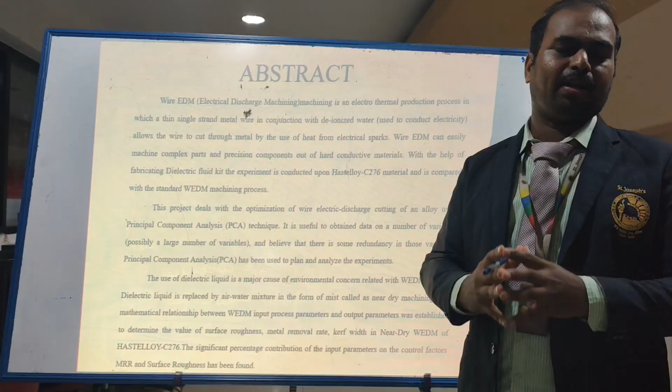As an abstract, first we have to know what is wire EDM. Wire EDM is an unconventional non-traditional technology in which it removes material in conjunction with deionized water, with a thermal zone between the tool and the workpiece. We don't have any physical contact between the tool and the workpiece. With a single strand of wire, the wire can be zinc or brass coated with molybdenum, of diameter 0.15 to 0.165 mm, used for this process.

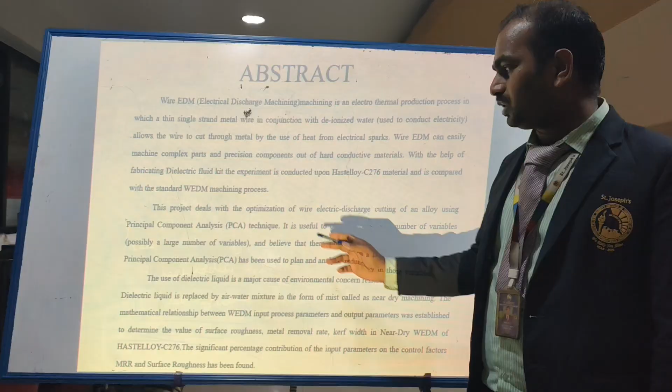In this technique I have given a short descriptive abstract. I am using a very important design of experiment technique called principal component analysis. There are various techniques available in software like the Taguchi method and surface response methodology. Here I am implementing principal component analysis with three modes of dielectric mediums.

So what is dielectric medium? Very often we use dielectric mediums of different types. The dielectric mediums can be kerosene, mineral oils, but the most predominantly used dielectric fluid is deionized water. The deionized water has a pH value that should not corrode the material, and should have no negative impact on the machine or on the superalloys.

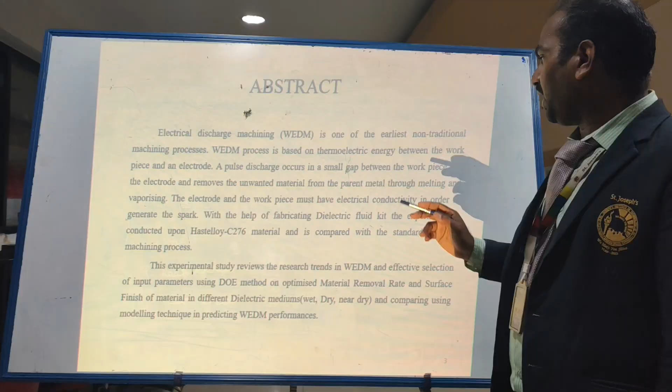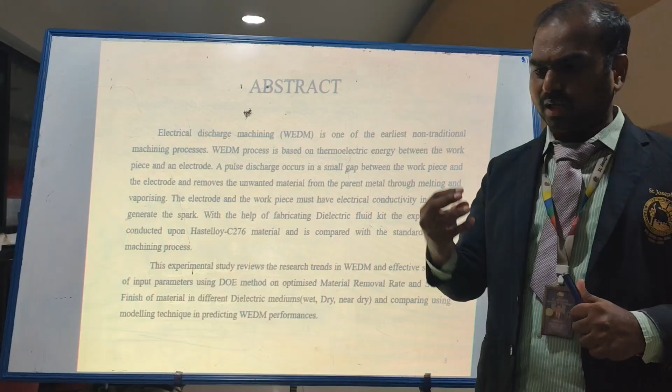As I said, wire EDM is a thermoelectrical energy process between the workpiece and the electrode, creating a small discharge between the tool and the workpiece. When the pulse on input is given, an electrical spark discharge occurs between the tool and workpiece, such that the variable gap creates debris of the workpiece and removes material in a phenomenal way.

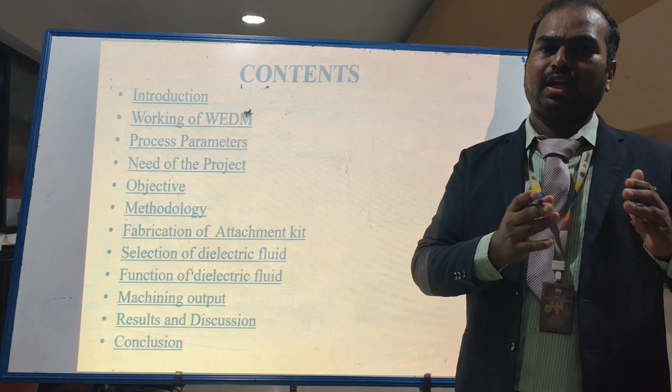The content of this topic is a brief introduction on how wire EDM works and how to choose process parameters. Each individual machine has various process parameters, of two types: input and output. Input parameters completely differ from machine to machine, whereas output parameters are phenomenally fixed, like material removal rate, surface roughness, kerf width, and also SEM analysis and microstructure.

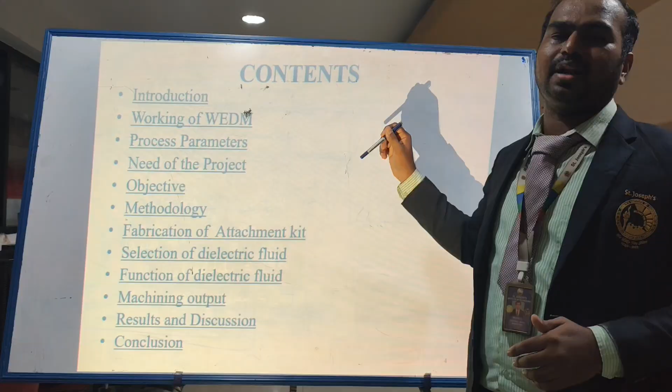This is why we choose this thesis and use these objectives and methodologies. In this research work we use a special fabrication unit technique with three different modes: wet medium, dry medium, and near dry medium. So first, what is wet medium?

In unconventional non-traditional processes, in both industries and college laboratories, we typically use only wet conditions. The wet condition involves deionized water flowing from the lubrication tank through the nozzle and inlet, hitting the workpiece, where the material removal rate takes place. So continuous flow of deionized water is called the wet condition.

What is near dry? Near dry involves a compressor and a nozzle fixing various pressures. For example, we take a compressor of 2 bar to 10 bar pressure, varying it to 6, 4, and 8, along with deionized water being sucked from the lubrication tank.

Through the nozzle, we are going to have a mist format in such a way that the material removal rate will take place in a phenomenal way, and the characteristics of the material as well as the material removal rate and surface roughness will be more significant when compared to the wet condition.

Next comes the near dry and dry conditions. The dry condition is only with compressed air. There is no need to use deionized water or any other medium source for machining. Only by using compressed air through the nozzle do we concentrate on the workpiece, where we machine very eccentric and complicated surfaces based on the designs.

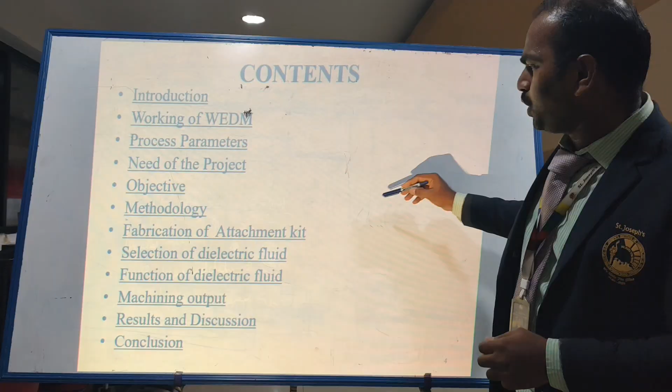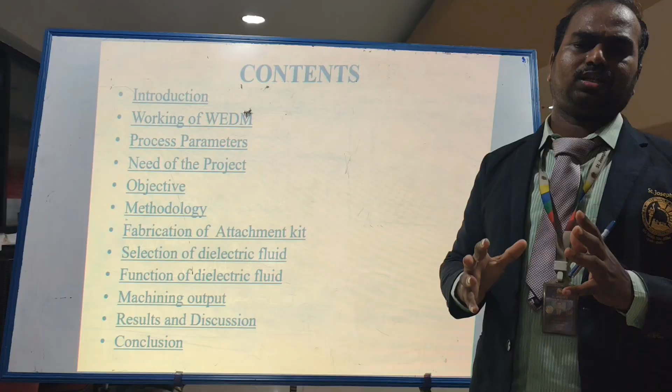Next, we are going to fabricate one single unit. In that single unit, all three mediums can be easily attained. By fabricating this technique, what I'm going to do is take the attachment kit, and by the side of the FRL unit, that is the filter regulator lubricator unit, we attach this kit in such a way that the three mediums - wet medium, dry medium and near dry medium - can be easily attained by this attachment kit.

So most prominently, they will be using only a single mode by using this technique. This attachment kit will help you create more applications and save more time, and the reduction of time will be easily obtained by using this kit.

The next one is the selection of dielectric medium. As I said in the previous research papers, many dielectric fluids are available - deionized water, mineral oils and EDM oils. Most phenomenally in the industries, they will be using only deionized water.

Why are we using deionized water? Because of the pH level and its availability, using deionized water in the process will not corrode the workpiece and fixtures, and it will create a more positive impact rather than a negative impact when it comes to choosing a proper dielectric medium.

Next comes the machining outputs. As I said, the machining output is a phenomenal factor which is going to focus on the input parameters that we give.

Input parameters for wire EDM can be categorized into various types. To be precise, I'll give an example - the EDX50X, a particular machine available in various industries. In these machines, we use input parameters such as pulse on time, pulse off time, wire feed, and the servo mechanism. These four parameters are very important input factors for obtaining the machining output - material removal rate, surface roughness and kerf width.

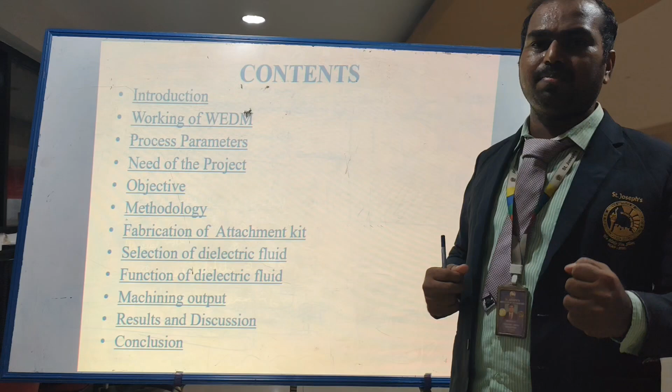So first of all, what is a superalloy? It is a very hard material which cannot be machined by normal conventional machining processes like lathe or shapers. Whereas when it comes to wire EDM, an untraditional process, these hard conductive materials with a low machinability index can be easily machined using this wire EDM with the latest technologies.

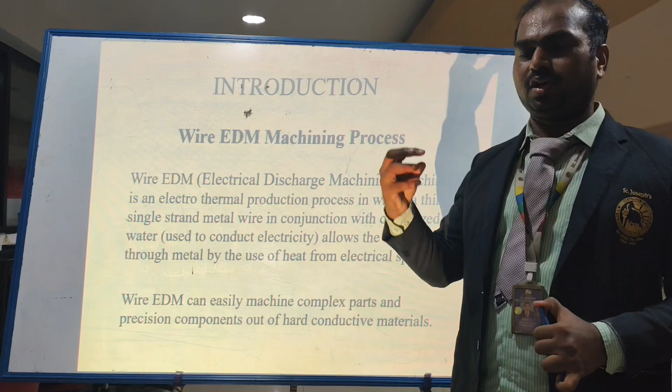Lastly, I'll present the results and discussion with a proper conclusion, including SEM analysis and various categorizations. As I said, wire EDM is a process that uses deionized water and creates a spark between the tool and the workpiece, in which material gets removed in the form of debris. This debris is then flushed away through the lubrication tank using the concentrated nozzle with various pressures.

So these EDM machines can be used in industrial applications for complex materials and eccentric shapes and designs which cannot be machined by normal traditional machining processes. Yes, so this is the basic diagram.

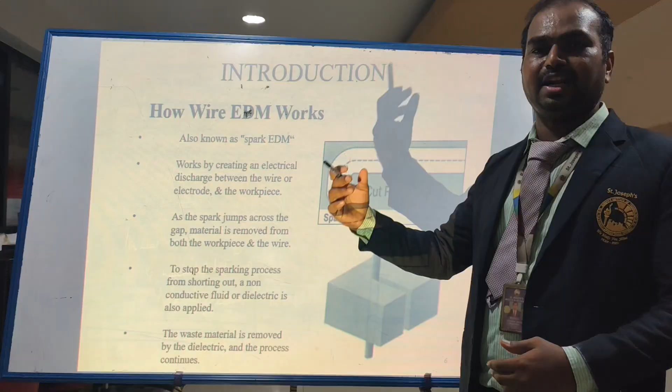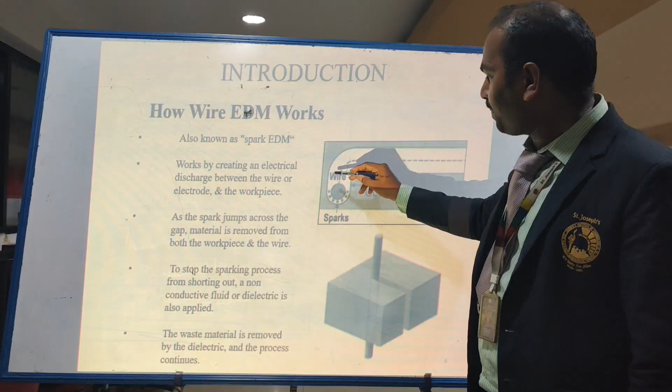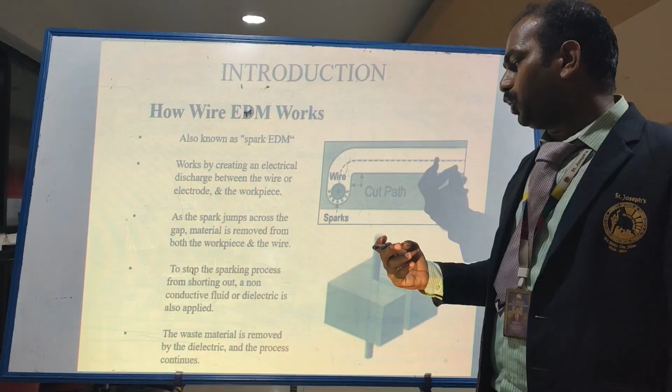First, this wire EDM, when connected with the positive and negative terminal, creates a spark in conjunction with the material, which can be either conductive or superconductive. Material removal takes place based on the path or design we input, and it cuts the material, with debris removed as per the pressure and pulse on time given. To stop sparking from shorting out, we need to choose a proper fluid, and dielectric application should be proper.

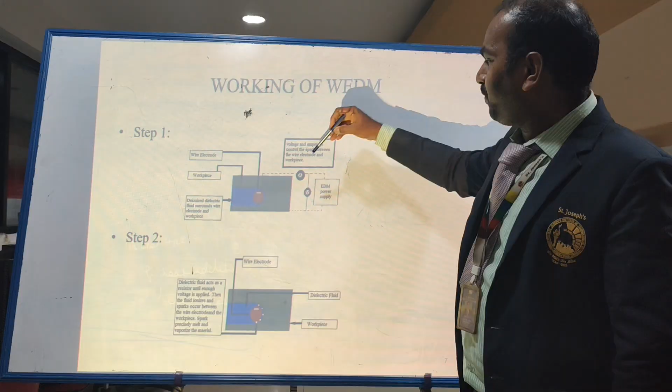I have framed the working of wire EDM in 4 basic steps. Step 1: we choose the wire electrode material, which can be either superconductive or very hard material. The wire electrode is surrounded by deionized fluid along with the workpiece, which is connected with the positive and negative supply of the EDM process.

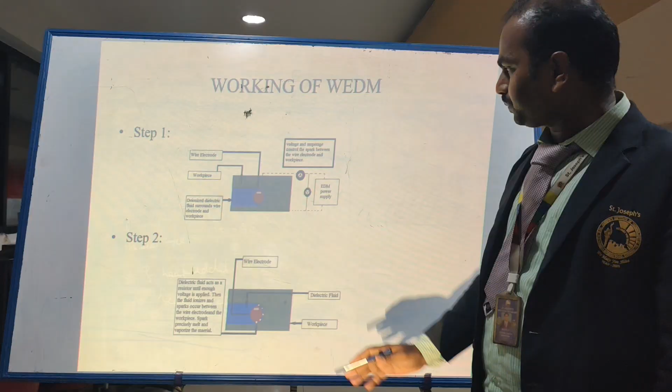Step 2: it creates an electrical spark in which a path is created between the workpiece, and it removes very fine debris which is flushed away in the dielectric medium. The last stage is this tiny dot of debris being removed based on the input parameters we give. So the dielectric medium, workpiece and electrode are prominent factors for choosing process parameters, which is very important when beginning the process.

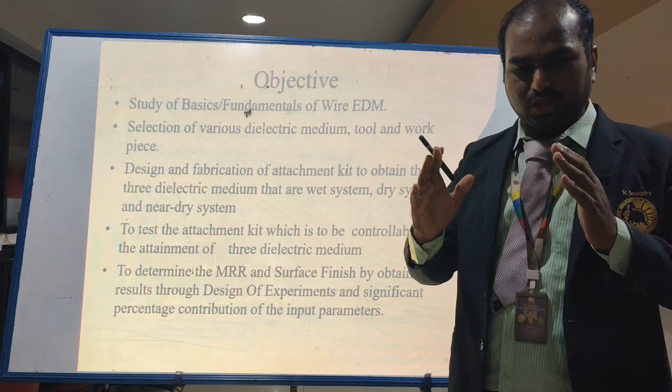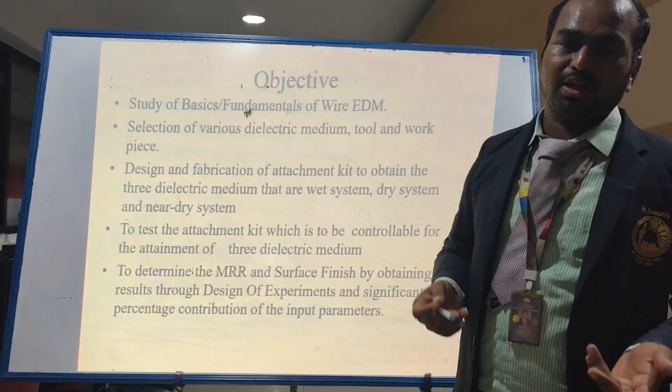This is the basic fundamental phenomenon for this research work: first we need to know the fundamentals of EDM, the selection of dielectric medium, tool, and workpiece. The dielectric medium can be categorized into different types: either mineral oil, natural or vegetable oils, or deionized water. Most phenomenally, only deionized water is used, otherwise called distilled water.

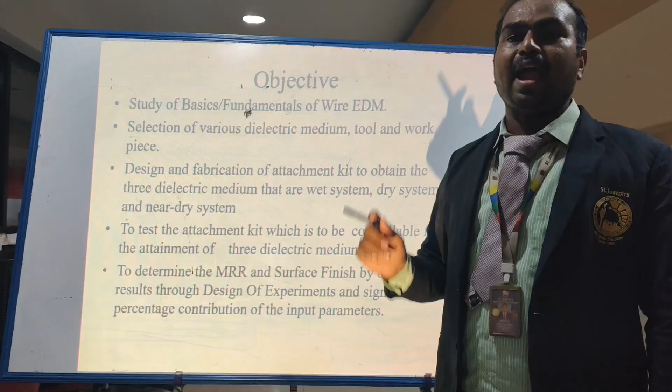The tool is always categorized into two types: zinc or brass coated with molybdenum wire. The workpiece should be superconductive and exhibit an electrical conductivity factor, with proper conductivity between the tool and the workpiece.

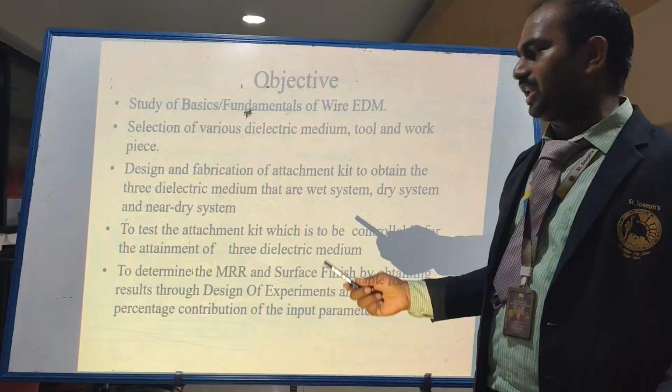This fabrication is a phenomenon factor where, as mentioned in the previous slide, we can obtain 3 modes: wet system, dry system and near dry system. The wet system is a continuous flow process where deionized water flows on the workpiece in a continuous, spontaneous manner. The dry system only uses compressed air.

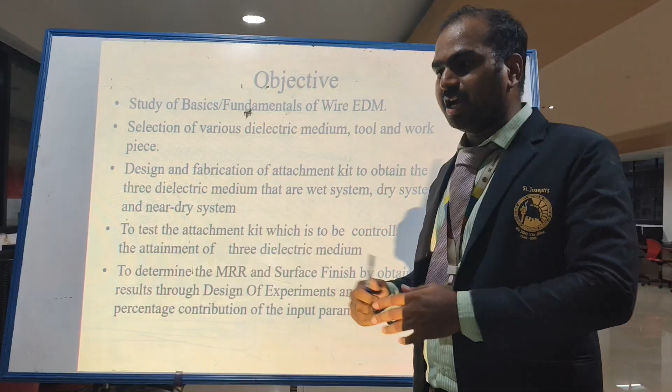We don't need any use of deionized water in dry mode. Near dry is the combination of both wet and dry conditions combined together, giving us a near dry process in the form of mist format. So mist format is just a very fine tune mist.

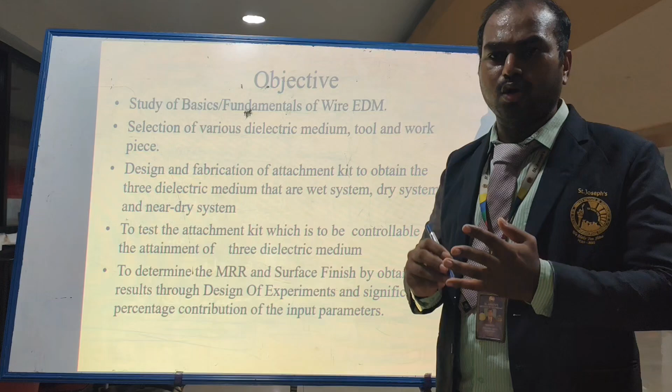For this, the special attachment kit is controlled using 3 control valves, flow control valves. By using these flow control valves, the 3 modes of deionized water mediums can be easily controlled to determine factors on MRR and surface roughness. Using the MRR and surface roughness output, we can easily analyze these techniques with the help of DOE, design of experiments, with various techniques available in software like response surface methodologies, Taguchi methods, and Grey relational analysis, bottleneck methods and mechanisms.

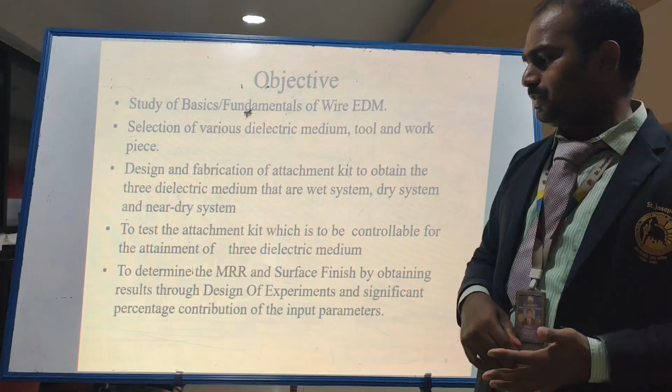In this technique, I have used principal component analysis to define these techniques. This is the basic methodology where researchers and students can take these methods as their projects, as research works for defining their assignments to take the process forward.

First, we have to choose the material. In this technique, I have chosen Hastelloy. Why Hastelloy? Hastelloy is a superconductive material. This C276 exhibits very good electrical and thermal conductivity with respect to the wire EDM process.

By using this principal component analysis, I am going to conclude what input parameters are given to the machines to get a fine-tuned MRR and surface roughness among the various orthogonal arrays. There are different orthogonal arrays - you can go for L9, L18, or L27. Among these, for the most optimistic values, it's best to choose only L27.

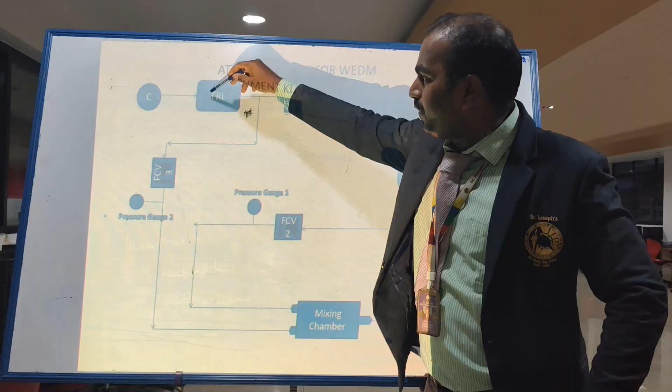Using the FRL, that is filter regulator lubricator unit, which is controlled by 3 FCV units - flow control valve 1, flow control valve 2, and flow control valve 3 - which can easily be monitored by pressure gauge 1 and pressure gauge 2. So these 3 parameters, the flow control valves and the fluid tank, that is the deionized storage tank, are connected to all 3 flow chambers, which are connected to the mixing chambers.

In this mixing chamber, you can obtain 3 modes. Either you can have a direct wet mode through the nozzle, hit the wire, and do the machining process - first condition. The second condition is dry condition, where you close off the deionized water path and use only the compressed air to enter the mixing chamber and into the nozzle, machining to the defined value.

The third one is where you use both chambers open. Both chambers open means you get compressed air and deionized water combined and mixed together, forming the right proportion of spray format which is attained in the nozzle, which then concentrates on the particular zone where you are going to machine.

So what about this nozzle design? The nozzle design is about how precise the nozzle is - either you can choose 0.75 mm to 1.25 mm, depending upon the application and the design, where we are going to use it for industrial applications and what type of material we are going to choose.

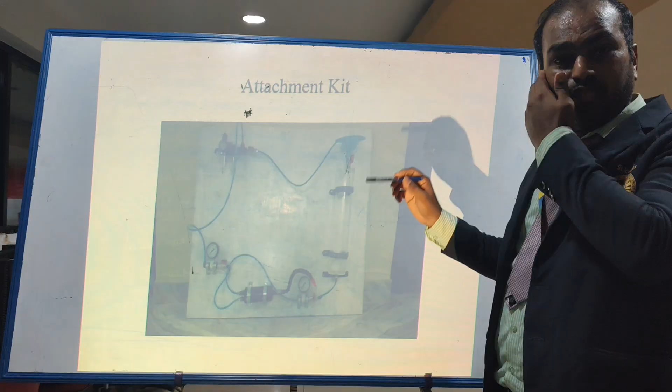What we have tried is, we are going to attach this attachment kit separately to the machine, where the process is going to be executed.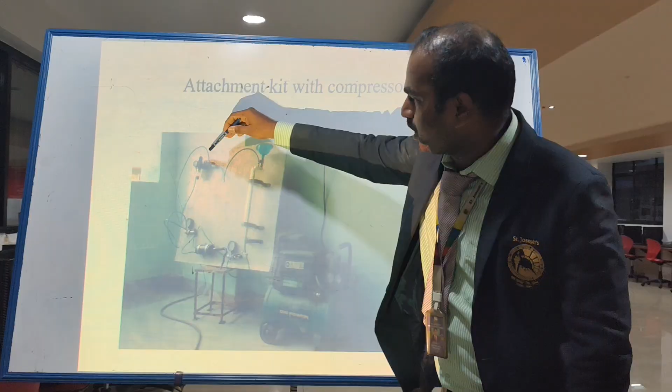Yes, before starting the research work, we have done many scientific research works using compressors. These compressors can be connected directly to all the valves, that is the FRL unit through pressure gauge 1 and pressure gauge 2, and the mixing chamber, which is connected to this nozzle.

You can see this nozzle. This nozzle is fixed, focused on the material where we are going to machine, where we are going to place the hardened surface, and machine the surfaces with a very phenomenal factor.

Yeah, this picture is very much precise and viewable. We took this wire cut EDM process machine, at the industry called V-cut in Gumudi, and this separate attachment kit is attached to the machine. In this case, the deionized lubrication tank is cut, and this kit is connected to the direct lubrication chamber.

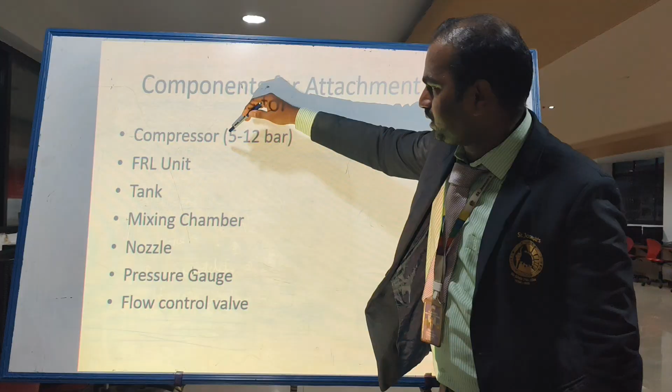Yes, this is the basic attachment kit. The compressor, as I said, you can use various categories of compressor, that is 5 to 12 bar, FRL unit, a tank, a mixing chamber, nozzle, a pressure gauge, and flow control valves 1, 2, and 3.

Yes, the dielectric medium - now I am going to describe how the dielectric medium works. Normally, while choosing the dielectric medium, the medium should not conduct electricity. The most important factor for the dielectric medium is that it should depend on the workpiece, the shape, the tolerance, surface roughness, and the surface finish.

The most important thing is the function of the dielectric medium. It should act as an insulating medium with proper electrical conductivity, and it should not have any negative impact on the machine fixtures. It should cool the spark regions, erode and flush the particles and debris along with the flushing pressure, and maintain a constant resistance across the gap between tool and workpiece.

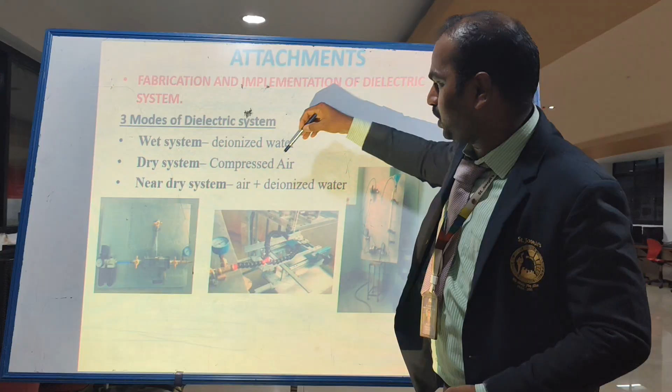For that we have taken many sources from research papers, industries and inputs. We have designed three patterns: wet system using deionized water, dry system using only compressed air, and near-dry, which is a combination of both factors, air plus deionized water, in the mist format.

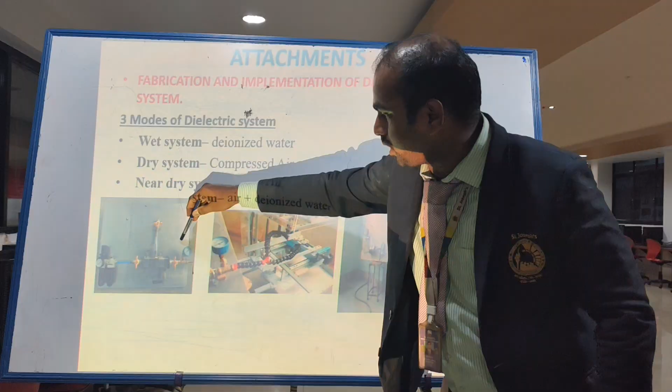All these phenomenon factors can be obtained in this setup. This is the FRL unit, connected with a pressure gauge, which can be easily monitored when the pressure is decreased or increased, from 5 bar to 12 bar.

These are the phenomenon factors where we are going to choose the mechanical, thermal and electrical properties of the dielectric medium. So we cannot blindly choose the dielectric medium, such as kerosene, hydrocarbon oils, water, or air.

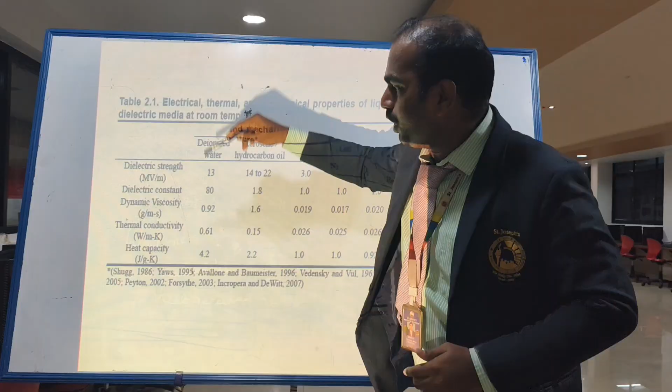Here we are just focusing only on deionized water. It should have proper phenomenon characteristics like dielectric strength, dielectric constant, and thermal conductivity. Among these phenomenon factors, you should have proper thermal conductivity, which is obtained between the tool and the workpiece. Among those, we are just going to concentrate only on deionized water.

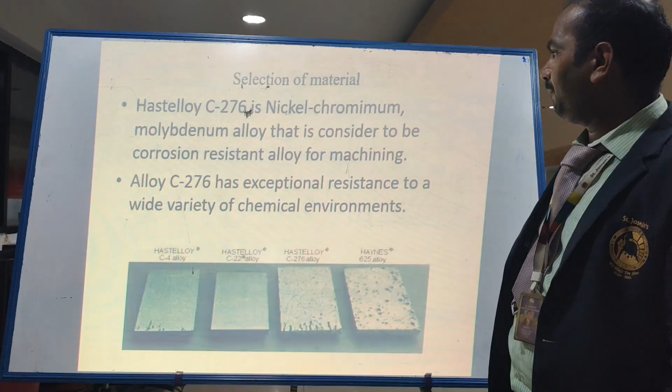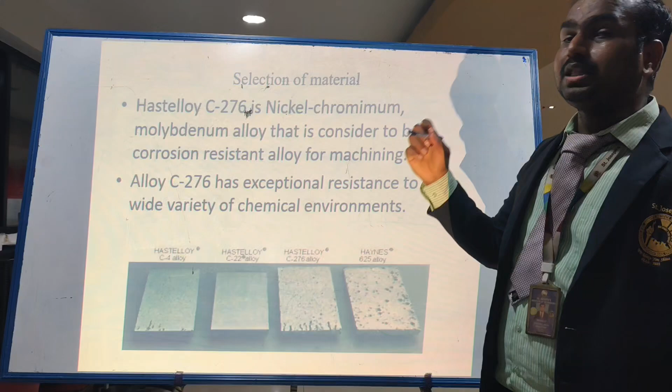This is the selection of material. The selection can be based upon your choice, availability, and budget. Here I have chosen a nickel based alloy, Hastelloy C276. In this Hastelloy C276, the nickel, chromium and molybdenum alloys play a phenomenal role, because the chemical composition of nickel is very high. In the upcoming slides I will show you the nickel percentage is 65 to 85% of the composition, since nickel has very good electrical conductivity and holds very good thermal conductivity during the machining process.

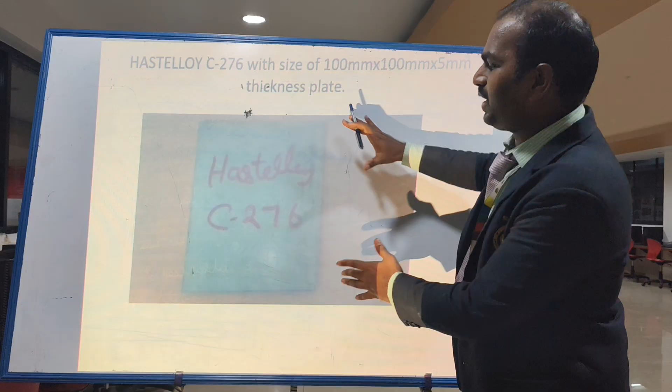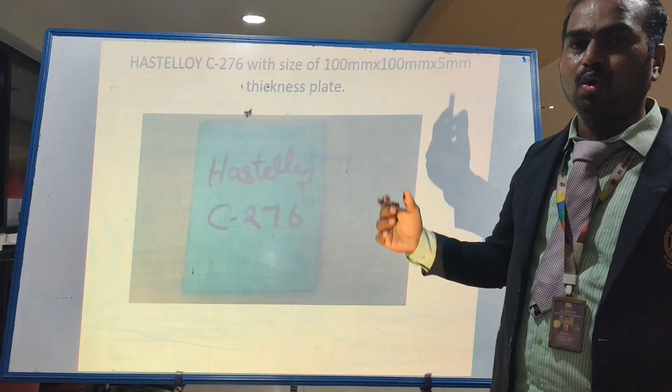This is the basic structure of the Hastelloy, with a dimension of 100 by 100 with a thickness of 5 mm. Normally we choose the material depending on the fixture and how we are going to cut it, whether it's eccentric or complex, and what way it's going to be designed. So we have chosen 100 mm length, 100 mm breadth, and 5 mm thickness plate. This is the basic properties.

The chemical composition, as I said, has a higher percentage of nickel, since nickel plays a phenomenal role with very good thermal conductivity.

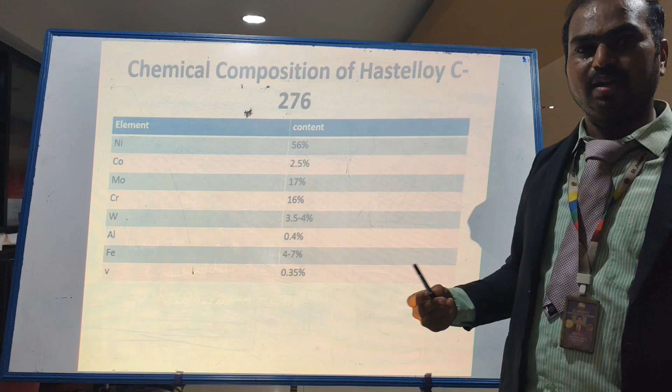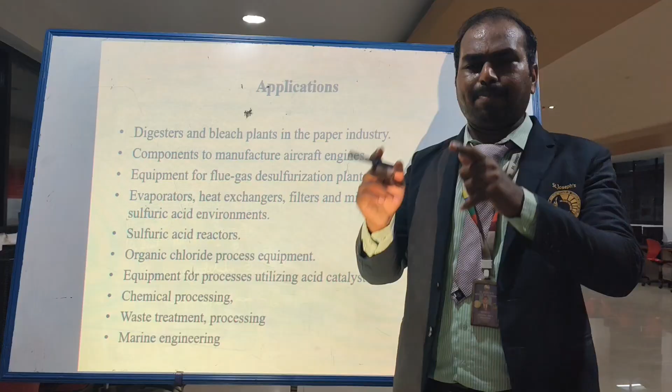Now we are going to talk about a very important factor: applications. Wherever we take up applications, the most phenomenal thing is where we are going to use it. This application is wire cut EDM. You can use it in industries like automobile sectors, aerospace, and nuclear power plants. The most important advantage is cutting eccentric and complex designs.

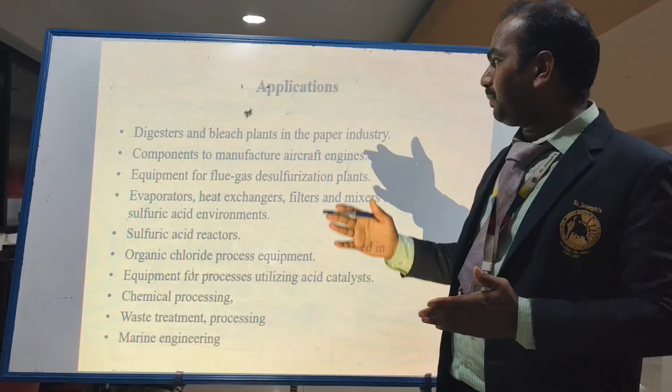What do you mean by eccentric and complex design? Cutting of hard material with complex shapes can be easily obtained in this process. Processes like desulfurization plants, heat exchangers, filters, and other complicated machining can be easily achieved.

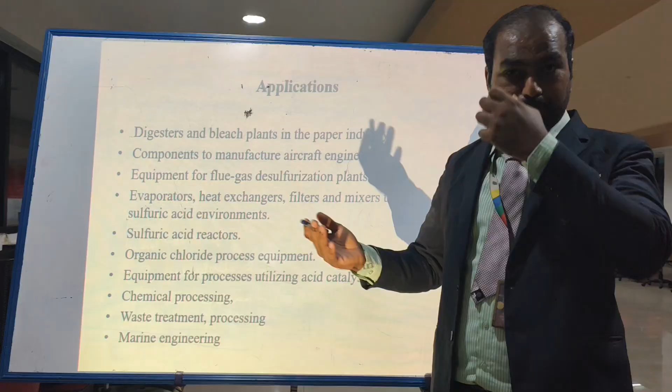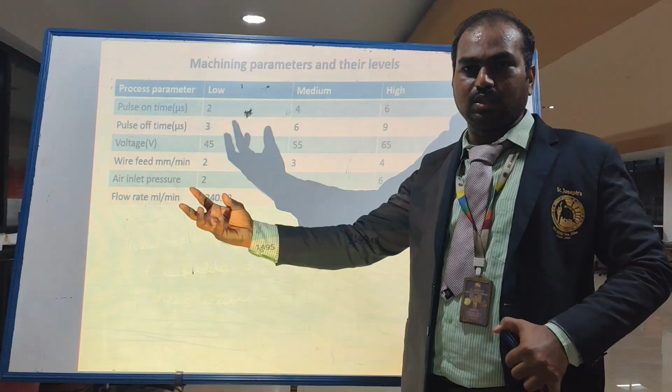Now I am revealing how we are going to choose the parameters. These are all the input parameters: pulse on time, pulse off time, voltage, wire feed, air inlet pressure and flow rate. The flow rate is MQL, the quantity of deionized water which is discharged to the nozzle, which hits the concentrated material.

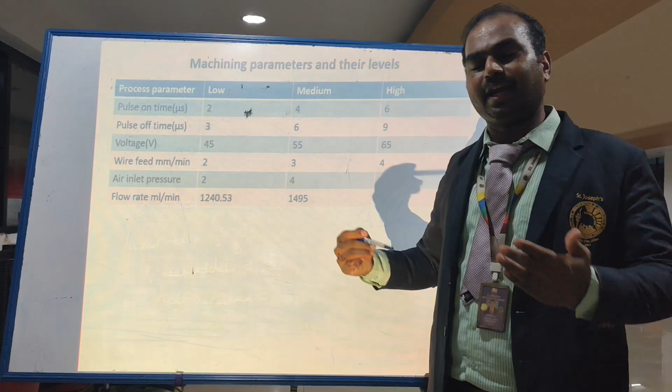Normally we are going to choose three parameter levels: low, medium and high. Many students or researchers may have different queries about why these factors have been chosen.

So you cannot choose the fixed value. When you're choosing the fixed value, you should have the range, right? The range should be of low, medium and high. Among those three, we have to take the average value which suits the machine and which is going to execute without any complex shape, right?

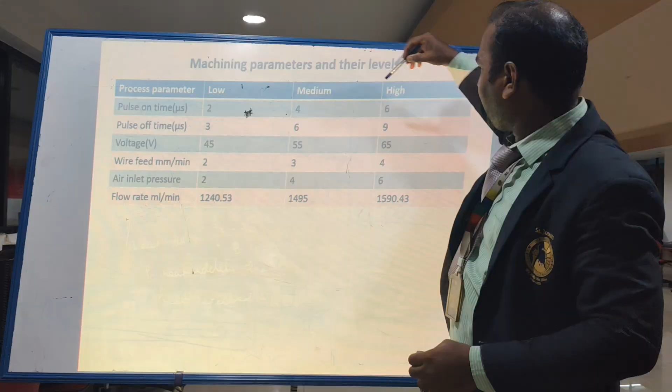So pulse on time is 2, 4 and 6. Pulse off time is 3, 6 and 9, and voltage is 45, 55, 65 and goes on. That is the feed. So this is not a fixed one, it depends upon the machine which you are going to choose, it's going to differ.

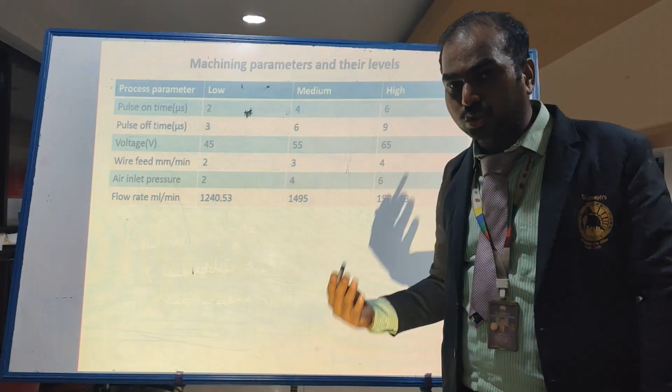Yes, I have chosen L27. As I said, there are different categorizations, L18, L9 or L27. To get the very best optimistic result, the researchers only go for L orthogonal 7, it's 27, right?

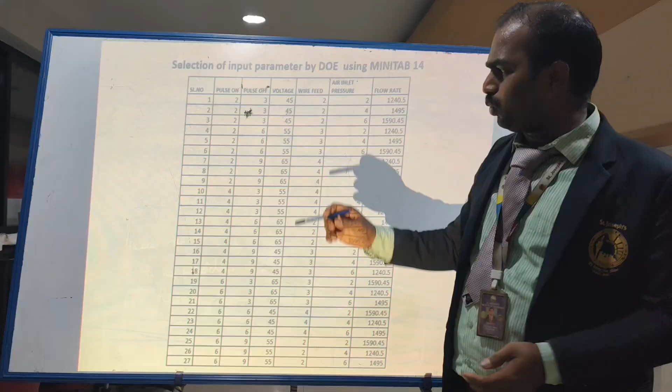So I have chosen, by using Minitab software, pulse on time, pulse off time, voltage, wire feed and the air pressure and the flow rate. I don't want to explain all 27 experimentations. I will explain only one, right?

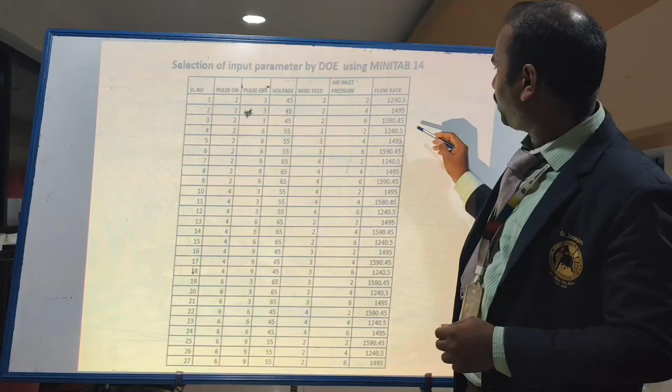So first factor is, I am just going to fix the pulse on time at 2 and pulse off time at 3, and voltage 45 and wire feed is 2. But then, by using the wire feed, I am just using a pressure gauge of 2. By using mathematical derivation, the flow rate of 1240.5 flow discharge is being heated through the nozzle and the machining takes place.

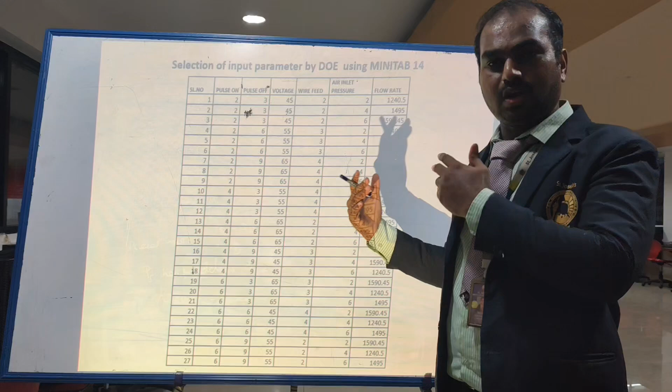For those values, what is the MRR, what is the surface roughness and what is the kerf width. So for all 27 we have done the experimentations by using various reference nodes and various industrial inferences. This is the experimental machining output.

So the parameters T on, T off, voltage, wire feed and air pressure are all the input parameters. Based upon the input parameters, we are going to note down the time. So time is a phenomenon factor for choosing the MRR and surface roughness.

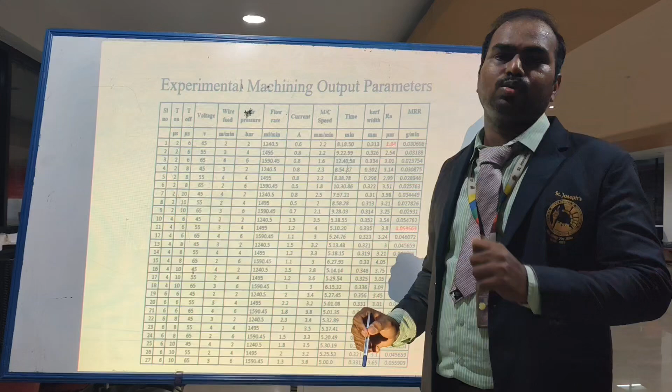So first of all, what is MRR? Material removal rate, that is the volume of material removed per unit time. So material removal rate per unit time.

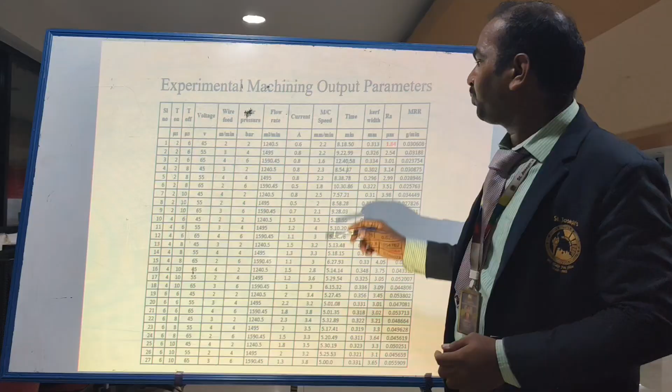So for this material removal rate, the factors are 2, 6, 45, 2 and the air pressure of 2 bar with the flow rate of 1240.5, and by using the IC current of 0.6, the machining speed is obtained as 2.2, and the time is taken in minutes, and for that the kerf width. The kerf width is the wire which travels between the path across the width. That width, top and bottom width, is calculated, and the surface roughness and the MRR can be calculated.

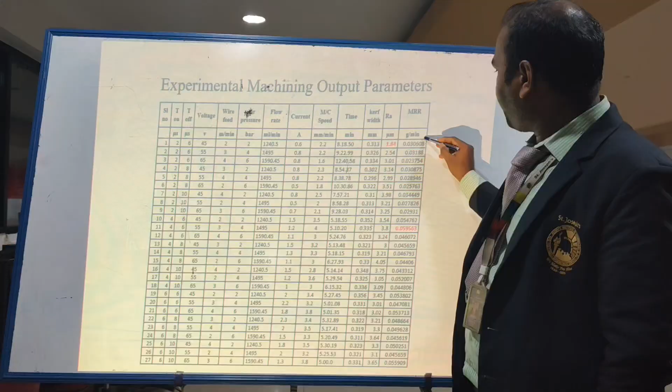So this MRR can be calculated in two techniques, that is before and after the machining process, and this surface roughness can be calculated by using a special technique called a 3D profilometer, where you get three values: RA value, RY value and RZ value.

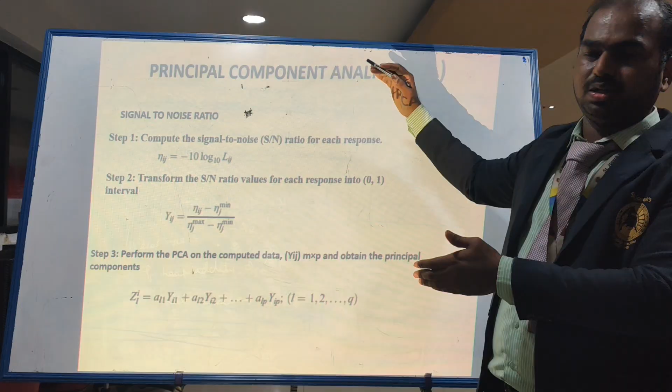Now I am just talking about a very important design of experiments, that is principal component analysis. Principal component analysis is the design of experimentation where you can step out and optimize the values. So I don't want to describe much, I'll be explaining the mathematical derivations, right?

So first thing is signal to noise ratio, where you're going to compute the analyzing stage. From there, we are going to transform the SN values for each response. The third step is we are going to perform the PCA with the principal components, that is the input parameters versus the output parameters.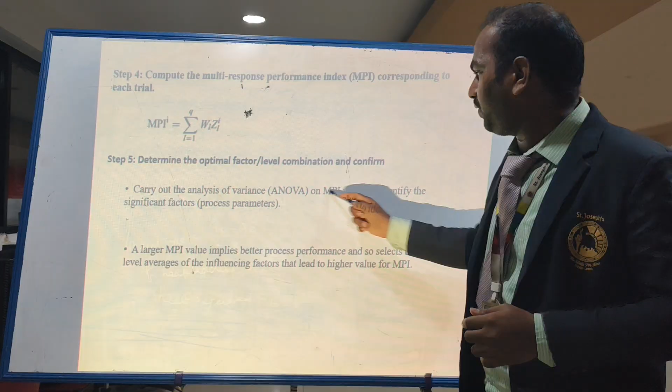Next, the last step is we are going to compute the multi-response performance, which we call MPI, corresponding to each trial. And the last one is depending upon the ANOVA analysis, we are going to have a combinational factor. By using MPI and ANOVA, we can easily conclude. So these are all the basic factors which I explained in the previous slide.

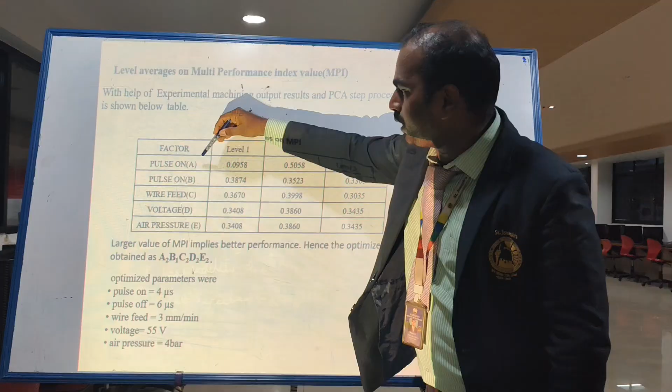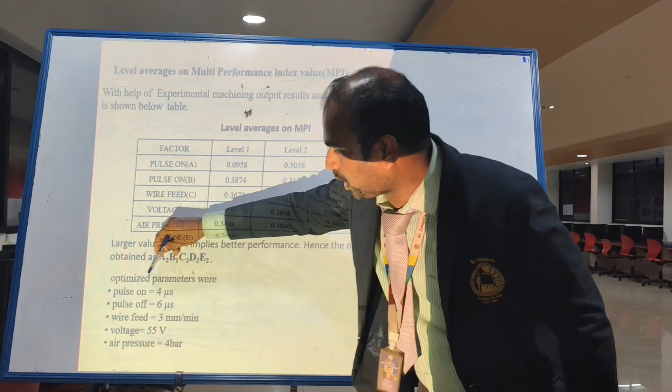Now I am just going to have a fine conclusion for my result analysis. I have chosen the result and discussion for two phenomenon factors: one is material removal rate and the other is surface roughness. The first is for material removal rate.

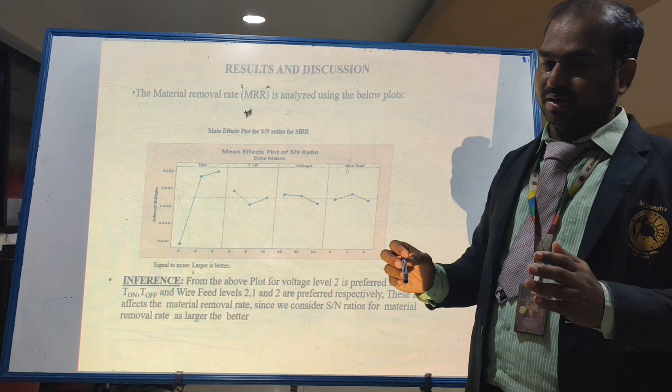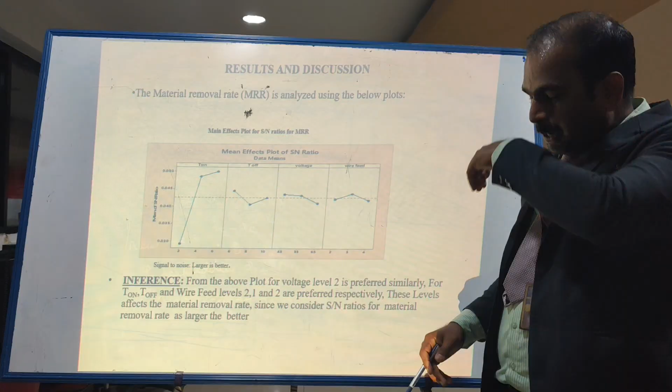The inference gives you the plot: voltage is much being preferred on, T off and wire feed. So pulse on time, pulse off time and wire feed are the phenomenon factors with respect to which the material removal rate can have a proper much greater, in the sense it has a more significant factor.

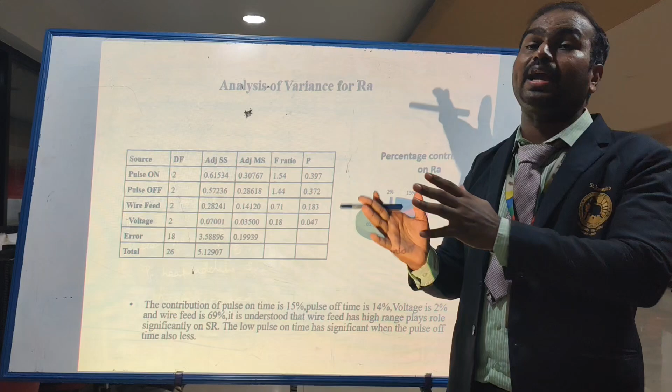So this is on surface roughness. Surface roughness creates an impact by choosing a wire feed of 69%, 15% on pulse on, and 14% of pulse off, where you can easily conclude that by using a proper wire feed mechanism we can easily obtain a proper surface roughness.

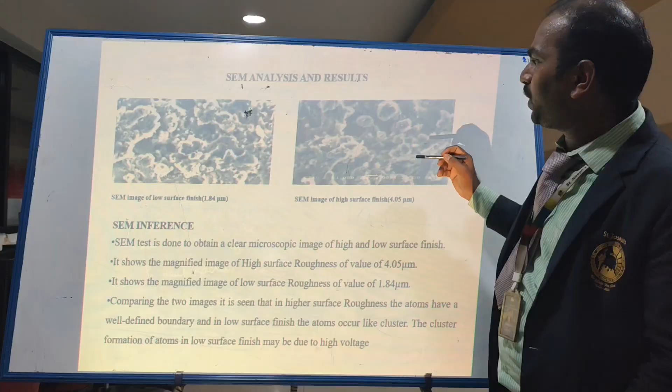By using this SEM analysis, I have chosen 7 among the 27 parameters. I have chosen SEM images, one for very low surface and one for very high surface, that is 1.84 microns and 4.05 microns. In these microns, the cluster distribution, you can easily see the clusters are very closely impacted and atomic bondings have been closely impacted, whereas in the surface roughness of 4.05 microns, the clusters are very unevenly distributed. You can easily observe this in the graph.

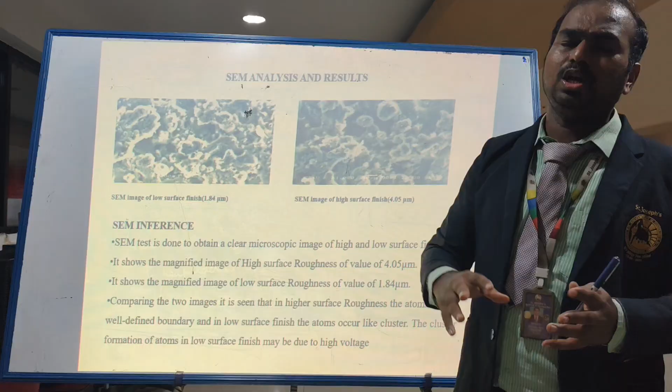So comparing the two images, the higher surface roughness atoms have well-defined boundaries. The clusters and the formation of surface roughness can be due to various factors like high voltage, less tension on the wire, intermediate power cuts, or unskilled labor during the operational process.

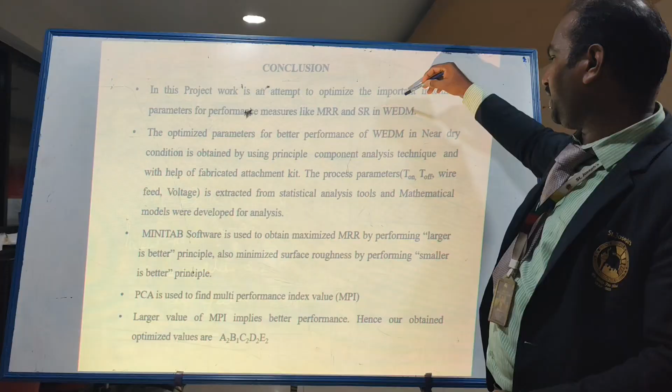By using this Minitab software, the performance, that is larger is better, principle has been obtained for MRR, whereas smaller is better is the principle we are going to use for surface roughness.

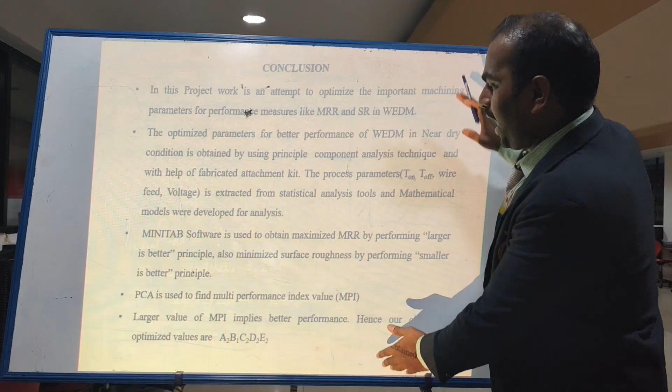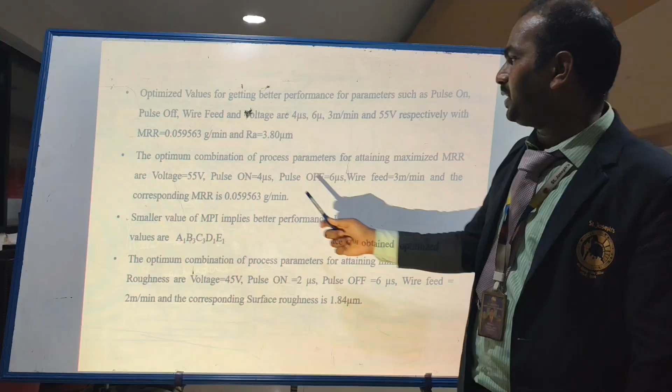So as I said, in the last concluding part, among the 27 factors, these are all the optimized values for getting process parameters for better MRR, which is 0.0596 grams per minute, and surface roughness is 3.80 microns. For obtaining the optimum combination of process parameters for MRR and surface roughness, using the MPI index values, the sequence is A1, B3, C3, D1 and E1.

So phenomenally, the sequence factors will tell you which factors have a phenomenon role and which factor is going to impact the process. I'm concluding this research paper with a very fine-tuned process, stating that the near dry process is the phenomenon and the latest technology which is booming across various technologies.